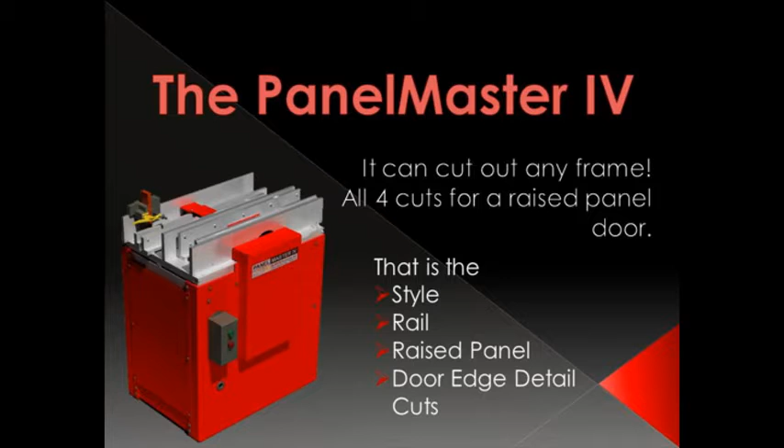We are happy to present you with the PanelMASTER IV, a raised panel door machine and the horizontal shaft shaper with 4 heads. The PanelMASTER IV can cut out any frame and now includes all 4 cuts for a raised panel door. This means that it can cut the stile, rail, raised panel, and door edge detail cuts.

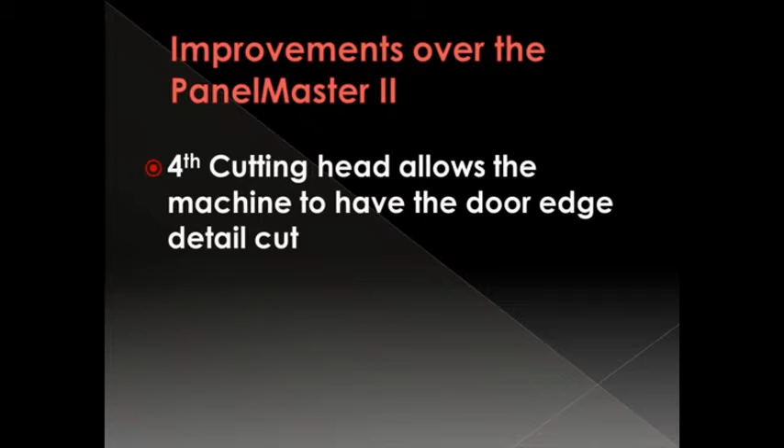Here are some of the improvements that we have added to the PanelMASTER IV since the production of the PanelMASTER II. We have added the 4th cutting head that allows the machine to complete the door edge detail cut. The PanelMASTER IV now has split bearing housing shafts that can be changed out more easily. We have created heavier housing, and now it has a machined and doweled aluminum frame for accuracy.

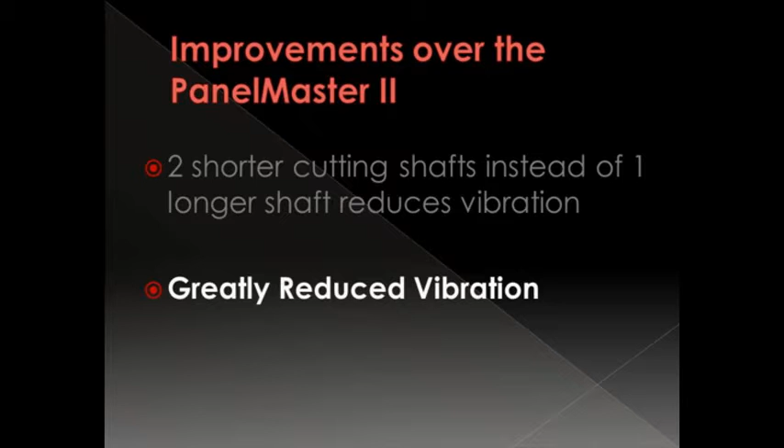The 2 shorter cutting shafts in place of the 1 longer shaft reduces vibration. This contributes to a machine with much less vibration than any of the previous models. Now we will begin by showing you how to set up and adjust the PanelMASTER IV. Before doing any adjustments on our machine, as in any machine, make sure it is disconnected from the power before we do so. Okay, now we're going to show you how to change out the shafts in a PanelMASTER IV.

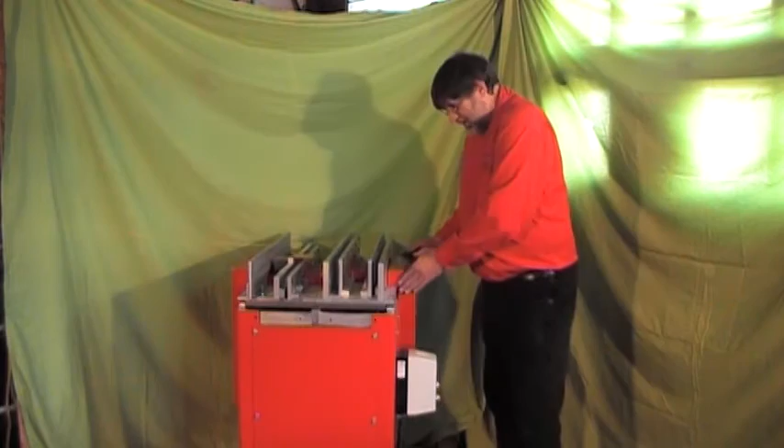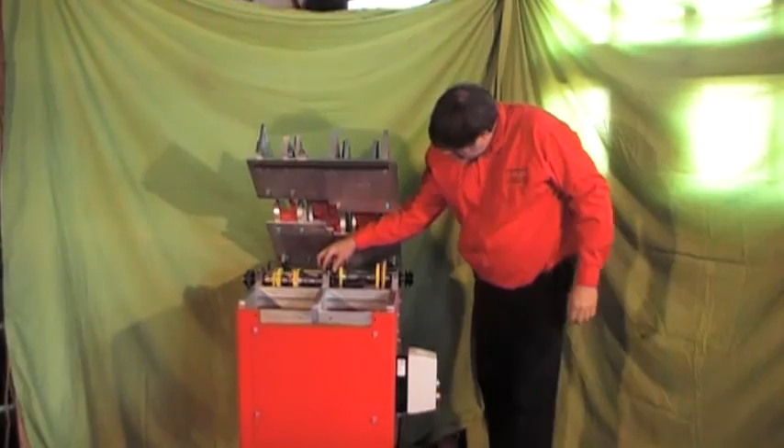I've already removed my bolts that hold the table down to the main frame and the 2 guards on the side. So I can set these guards off. I can grab my safety pin. As I said, the bolts that are across here that hold it down on each end are already removed. And we can raise the table on up. Now I have the cap screws on top of my shaft, here, on top of the bearings. I've got those loosened. I can set these off. Now the shaft is just sitting there.

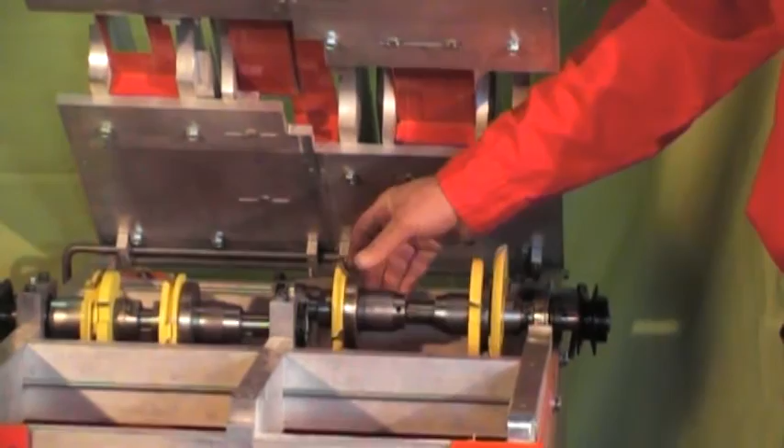This shaft has the same cutter that is part of our set of cutters that is over here in our rail cut. So the inside of our rail will match the outside of the door in this particular case. So I can set this shaft out. I can grab a different shaft. The bearings have little nubs to keep them from twisting in the housing. Those nubs need to be pointed straight down, and they will fit down into that housing, and you'll feel the click as it falls in place. Then I can put the bearing housings back on and lock it down.

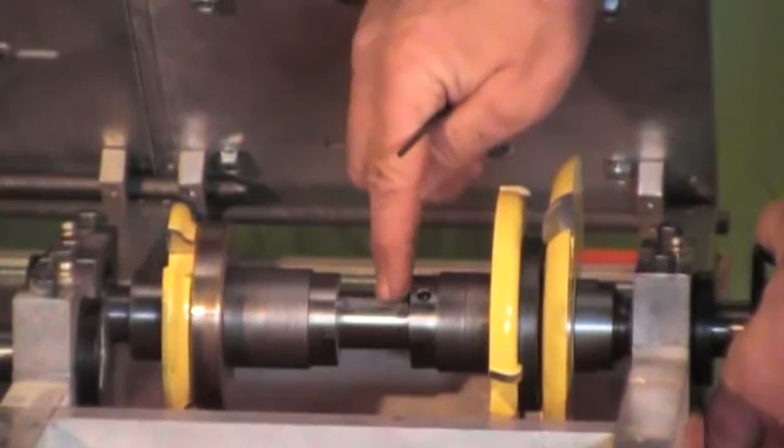Okay, once again, this cutter shaft was already set in location where we want our cutters. But if we were starting new, we would have our arbors loose. Key for the first arbor and its set screw. The second arbor on a shaft, we always want to go into the opposite with its key and set screw. Now, while we're here, we can loosen and slide these. And we want to make sure that we have all four cutters slid in place before we close it down. Otherwise, our cutter could come up into our guards and damage our cutters. But in this case, we've already got them all in position. But when you have the table up like this, we can easily move our cutters side to side.

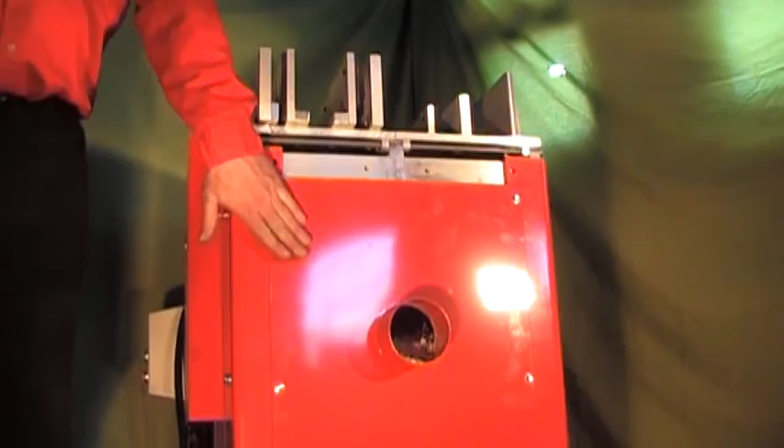Now, if for some reason we need to adjust the cutters side to side on our shaft, rather than raising the table, we can get at them by removing the back cover, which is the discharge side of the machine. Now to adjust our arbor side to side, now that we got the back cover off, we can reach up underneath here, loosen our set screws, slide our arbor back and forth, and retighten it. Changing the cutter shaft.

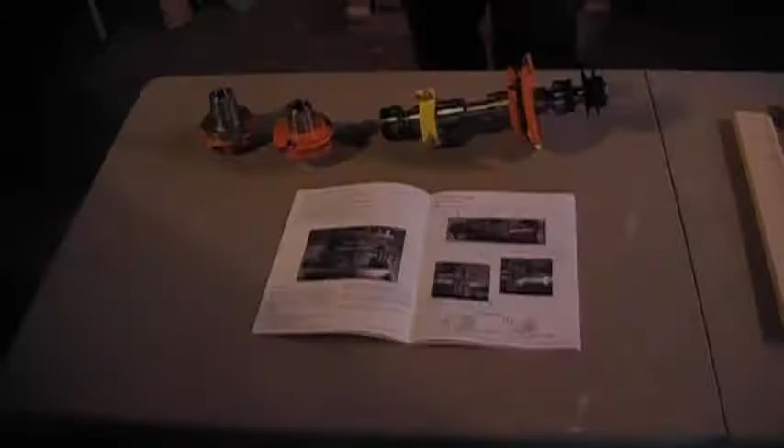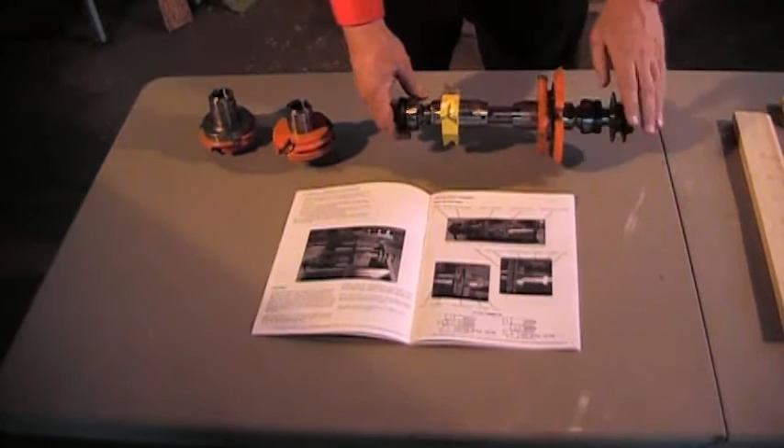Okay, once again, we're looking at the cutters here. This would be our raised panel. This would be our door edge detail. On our cutter shaft, if we have it up in the machine, I have the two bearings that lock it in place. But I could take this bearing loose, remove the nut on this end, slide off this cutter, stick another cutter back on, retighten the nut, put the bearing back on, leave the bearing loose until we are in place, and then retighten the housing of the bearing.

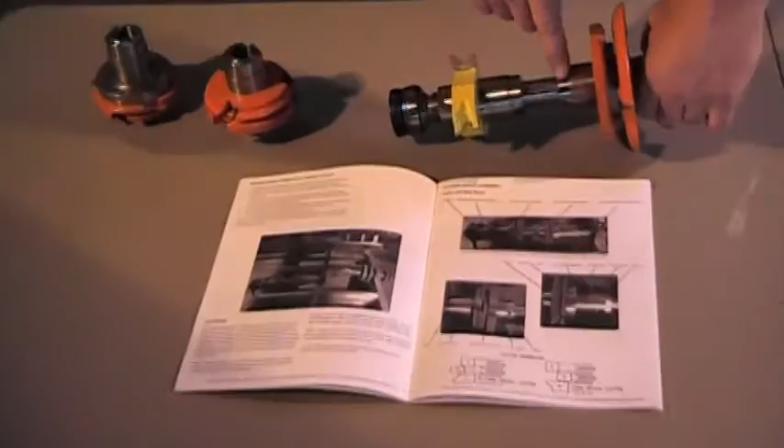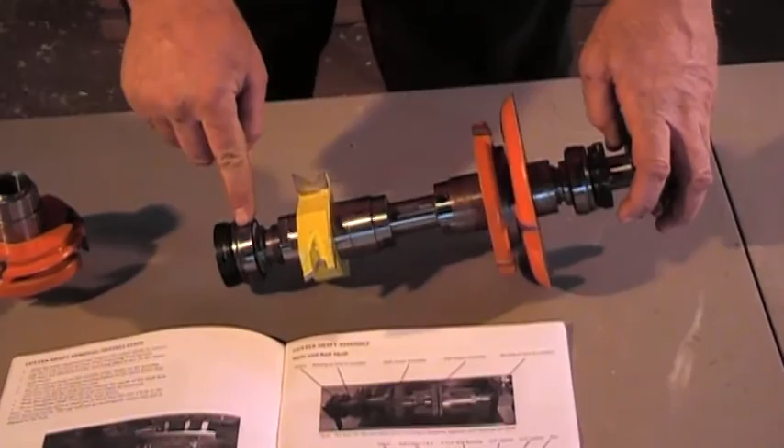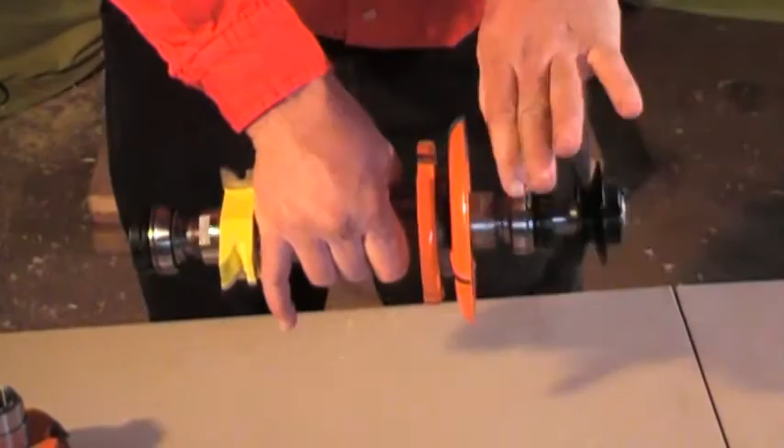By doing that, the cutter is going to line up into the same place every time. To change our raised panel, once again, the head is at the inside, the nut is to the outside, so we would be removing the pulley and the bearing. If you only loosen one bearing at a time, this bearing would be off, this one would be set in place. We could pull everything off of this end, stick her back on, reassemble it, set it back into the PanelMASTER, lock the bearings into place, and then lock the collar of the bearing. That will keep this side of every one of our cutters in the same place.

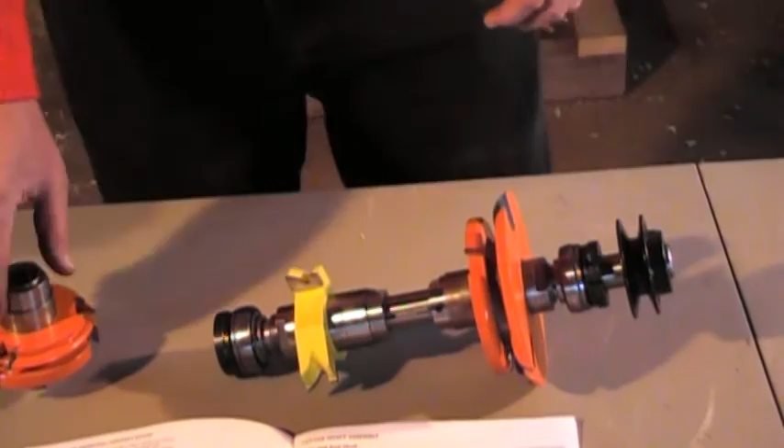Now we can have preloaded shafts. Some customers are just loading up their arbors and sliding them on each time, in which case you're going to have to adjust your location of your arbor every time.

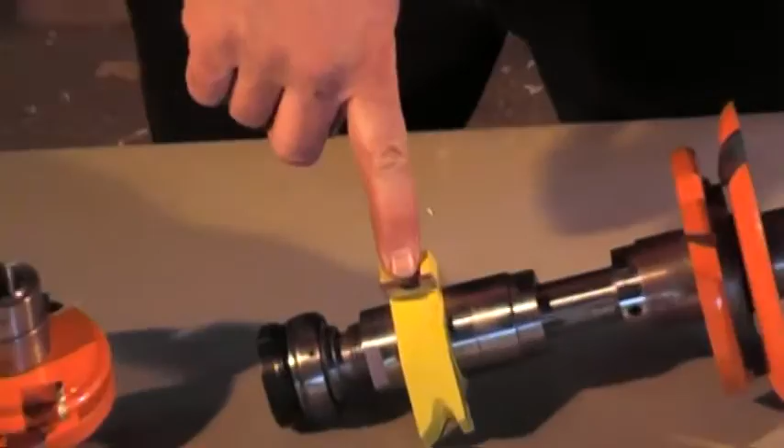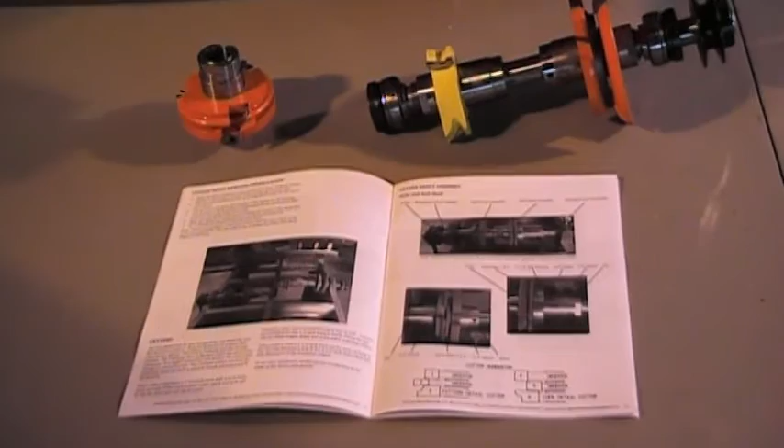Now here's the door edge cutter, but if I want it to match the same cut on the outside of the rail as on the inside of the rail, I would want this cutter. So if we would look down in our stack of cutters, that would be called the pattern detail cutter, which is cutter number 3 out of a cope and pattern set from Freeborn. So if that is what we want to do, we want to order a cope and pattern set plus an extra cutter number 3.

Cutting a raised panel door. Here we have the 5 boards that make up a raised panel door, and we're ready to cut our raised panel door. First cut I'm going to do will be the inside cut on all 4 rails. Let's start the machine and cut them.

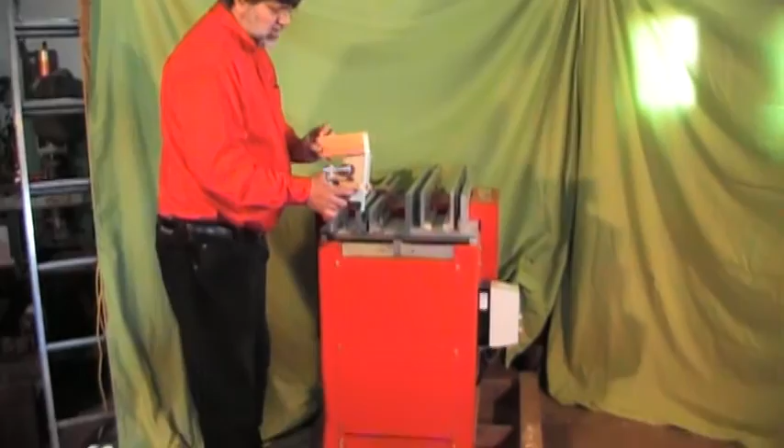We have made those 4 cuts. Now is the time to cut the stile cut on the end of our short rails. To do that, we grab our stile jig. We want to make sure we line up our board such that we are cutting the pattern the right direction and not on the opposite side.

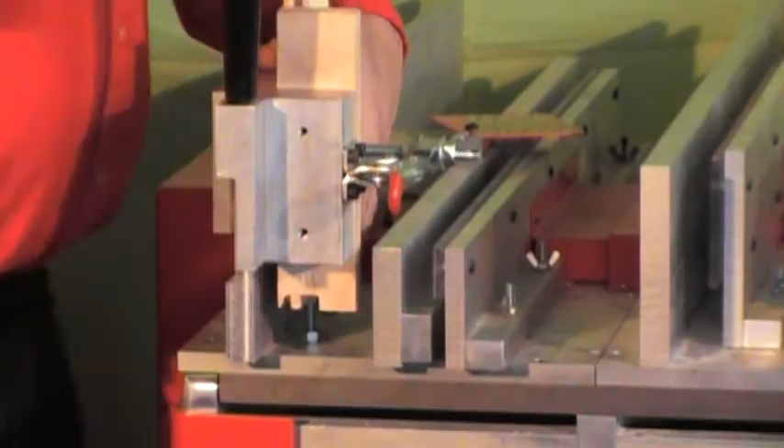So we place our stile jig in place, drop our board down to our stop bolt, lock it, start. Here we've made our first cut, and we can see that it slides in properly against our rail.

Now make the other 3 remaining cuts. Our cut was like this. We want to flip our board this direction, set her back down. Now grabbing the second rail, repeating the process.

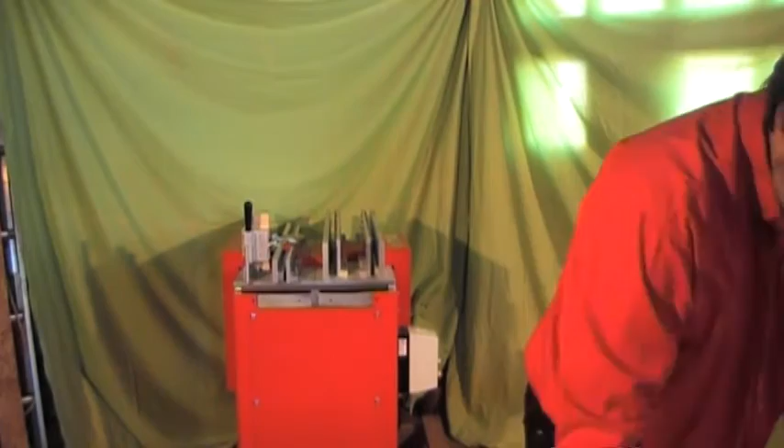Now I want to cut the 4 edges of our raised panel.

Now we have all the sides of our door cut. We can set our raised panel into place. Set our stiles into place. Push that against our raised panel.

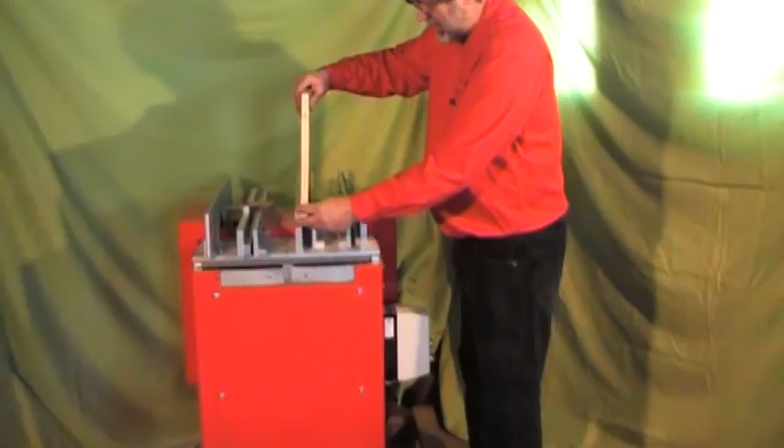We have our panel all assembled, ready to be glued up. And once we have it glued up, we can use the door edge detail around the outside as we showed with just a plain panel earlier. The back side, with the back cutter, we are flat all the way across here and all the way across the front, if all of our boards are the same thickness, which is what we want. It makes it easier to set her in place and slide across our raised panel cutter, or our door edge cutter.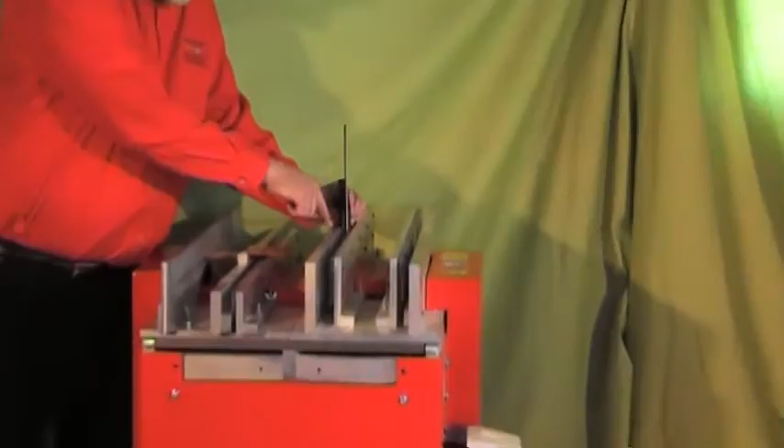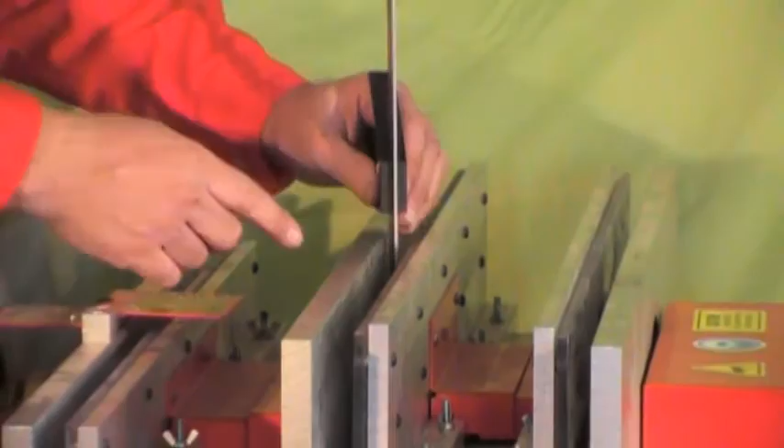Now for setting our fixture or our jig for cutting the outside door edge. Once again, my combination sliding square. In this case, I have a rub bearing to set down to, and I set it down to where we're on the rub bearing and lock it. If I'm not running a rub bearing and using a door edge detail cutter, I'd want to turn it so that the cutter was pointed straight up and set right down into the bottom of the center of the cutter. This gives me the distance. I just have a panel as opposed to a finished door here that we're going to put the edge detail onto.

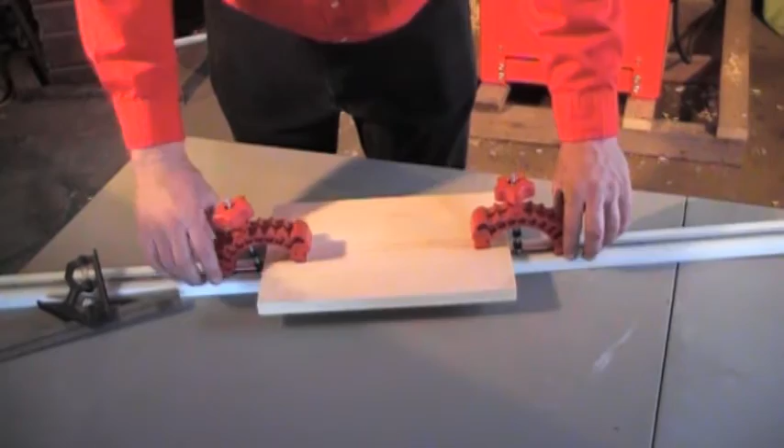Get my clamps lined up and in position. Now the distance we had measured on our machine, we will slide over to where it just touches and clamp. Do the same on the other end. And clamp it. Once again, I'll check both sides again. Make sure we're still okay.

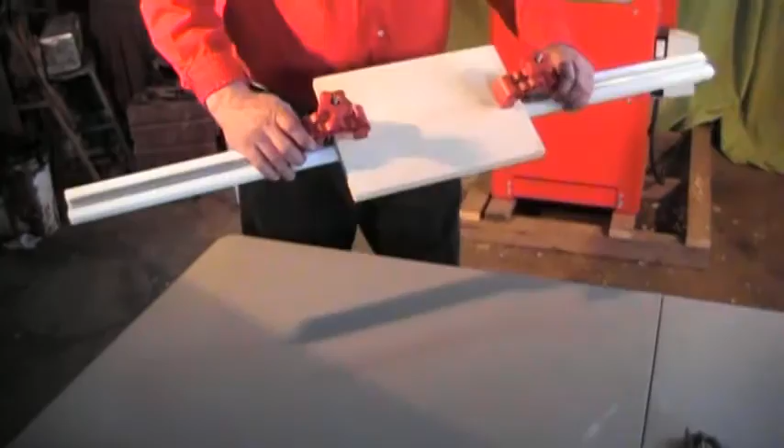Now we are ready to cut the edge of a door. Our T-track sits on top of the fence. And we can slide it in place and slide it on through. I'm going to turn it on. Now we have the detail for the edge of our door.